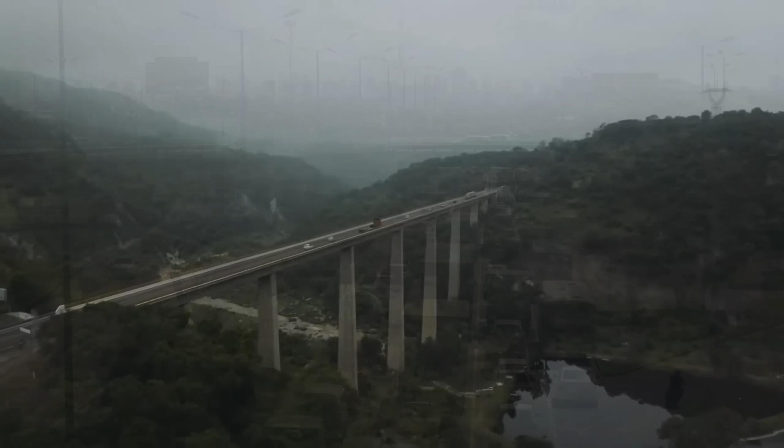When we head out on the road, whether it be our daily commute, a trip to the store, or simply for fun, we are, by default, putting ourselves at much greater risk due to the inherently dangerous nature of driving on its own. The risks of driving are due to many factors, most of which, though, drivers are expected to remain keenly aware of when sharing the road, stopping at red lights, yielding to traffic, observing speed limits, a number of factors we're expected to keep an eye out for at all times.

However, the integrity of structures used for carrying this traffic is, quite reasonably, not something we're ever expecting to crumble out from under us. On Wednesday, August 1st, 2007 though, at roughly 6 p.m., a busy time for evening commuters, the main deck portion of the I-35W bridge in Minneapolis, with more than 100 occupied vehicles and 17 construction workers aboard its deck at the time, collapsed suddenly into the Mississippi River below.

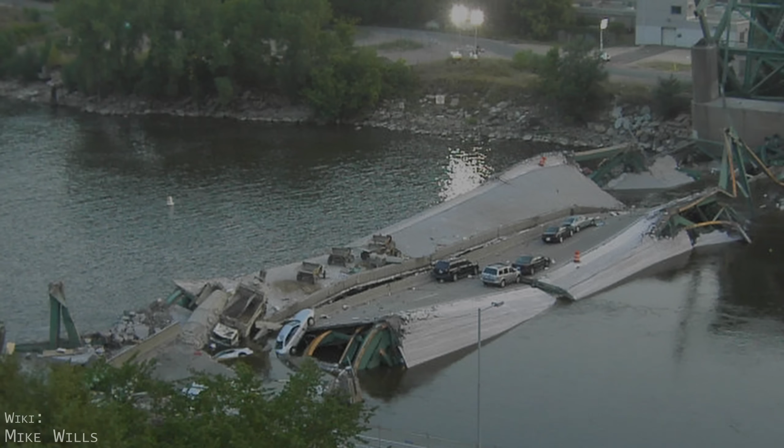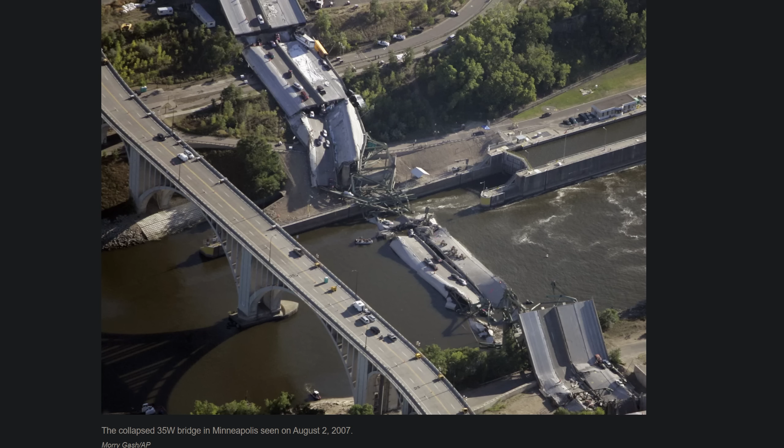This catastrophe claimed the lives of 13 people, and 145 more would be injured. 1,000 feet of the nearly 2,000-foot-long, 8-lane bridge had fallen away, roughly 450 feet of which falling into the 15-feet-deep waterway below. The initial scene was overwhelming, and many were understandably panicked.

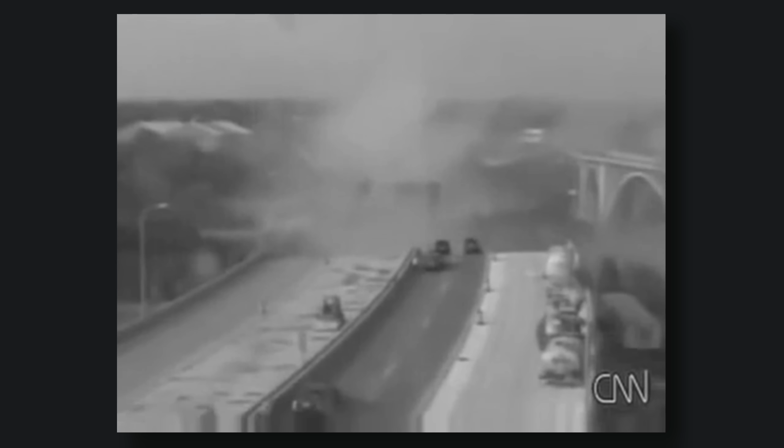Motorists nearing the span that had just collapsed began turning around and driving away frantically. Those on board the bridge's now precarious approach spans that were left still standing began fleeing their vehicles as virtually everything in their field of vision had just dropped away instantly as they were commuting, and into a cloud of dust, chaos, and confusion below.

Folks, we're looking at a surreal scene right now. Just to bring you up to date, this is the 35W bridge over the Mississippi River. It has collapsed. By our crew's estimates, citizen first responders on the scene numbered over 100 plus.

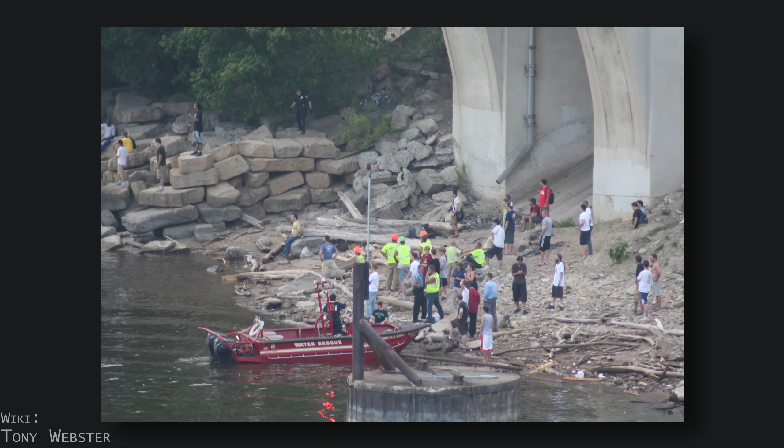Construction workers just then leaving and arriving for their shift, students and staff from the nearby University of Minnesota campus, medical personnel from the nearby Red Cross building, in addition to many brave passers-by, many of which entering the river, pulling construction workers and motorists they could reach to safety.

The collapse took place at roughly 6 p.m., and by 6:10 as the first Minneapolis police and fire units began to arrive, eventually totaling 19 fire engines, a command post was quickly established by authorities in the Red Cross building's parking lot nearby. By 6:14 p.m., the Hennepin County Sheriff would be the first to arrive on the water and begin conducting rescue operations in those areas where stricken vehicles had been trapped in the river.

Hennepin County Medical Center initiated its disaster plan, calling in more medical personnel, readying local hospitals, and dispatching all ambulances available to the rescue site.

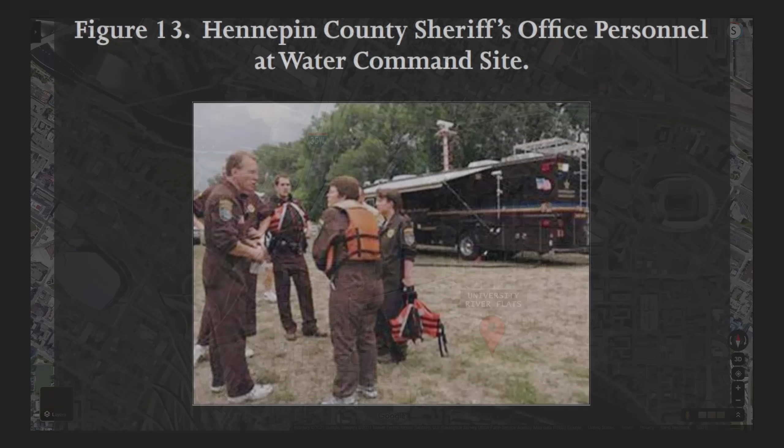The Sheriff's Office would establish their River Incident Command Center by 6:25 p.m. on the north bank of the river near the University of Minnesota's River Flats. This was the closest point on the riverbank with enough boat ramps for such a rescue effort. Before the first hour would be over, 12 public safety agencies had arrived, bringing a total of 28 watercraft to assist with the precarious river rescue.

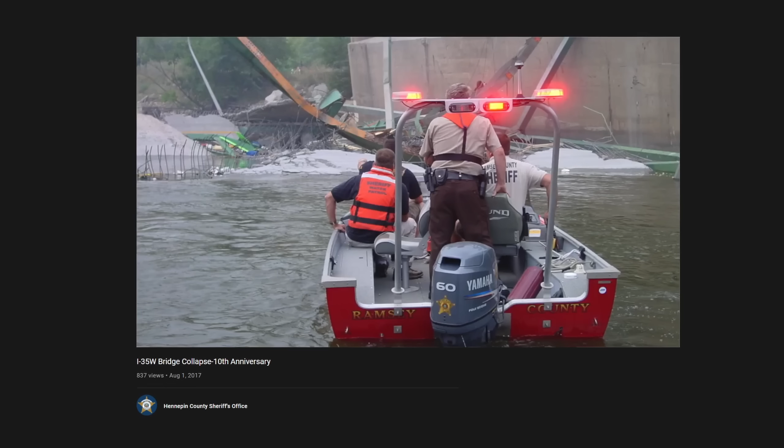By 7:27 p.m., command of both operations declared all water teams would go from rescue to recovery. On August 2nd, the following day, the U.S. Coast Guard arrived on scene to form a temporary security zone from the upper St. Anthony Falls to the lower portion. And at 7 p.m. that same day, command of the scene was transferred from the Minneapolis Fire Department to the Police Department, as it would then be declared a crime scene due to the possibility of an extremist attack being the cause.

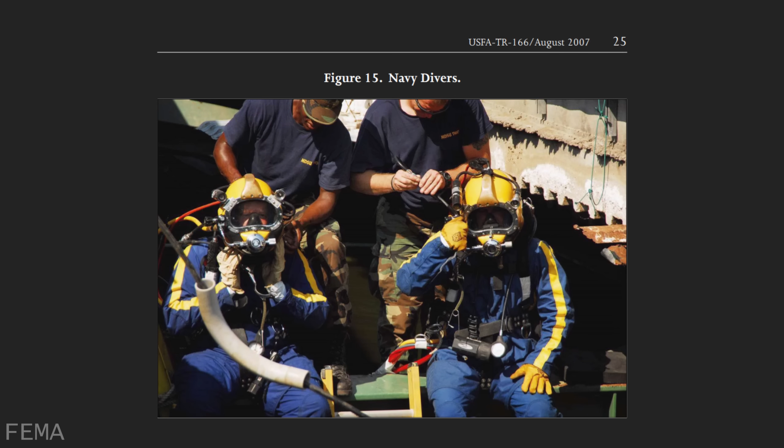By August 4th, the Hennepin County Sheriff's Office requested further aid in underwater search and investigation. The FBI's USERT, or Underwater Search and Evidence Response Team, and U.S. Naval Sea Systems Command diving and salvage teams arrived on the 5th and 6th, respectively.

By the time this monumental rescue and initial investigation had been completed, a total of 190 people were confirmed to have been on the deck or near the bridge at the time of the collapse. Of the 190, 13 were fatalities, 34 received serious injuries, 111 received minor injuries, and 32 were either uninjured or unknown.

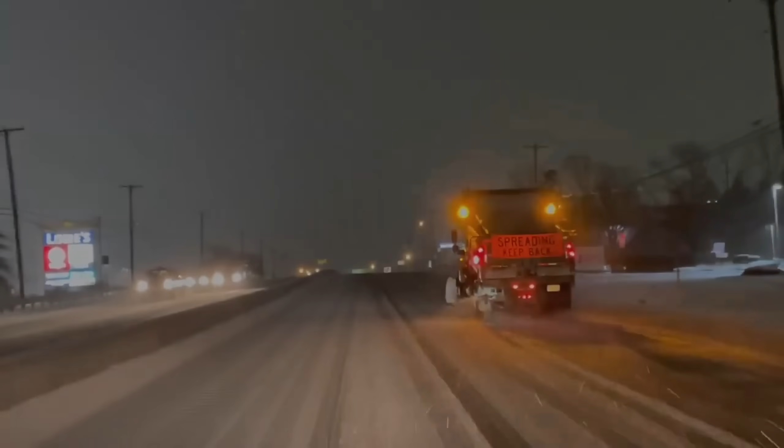The matter of bridges and their construction in the United States is complicated, much like the country's infrastructure issues in general. While regulation, budget, and maintenance standards can vary greatly from state to state, so too can overall climate and topography, as the nation runs the gamut from coastal marine environments, dry southern deserts, to harsh long winter climes, where road surfaces have been heavily salted for decades.

Designated Bridge number 9340, commissioned by the state of Minnesota's Department of Highways between 1964 and 65, Bridge 9340 would be designed by Sverdrup and Parcel and Associates, with these designs ultimately signed off on and approved by then named the Minnesota Department of Highways.

Its deck approximately 115 feet above the lower end of St. Anthony Falls, the bridge would ease traffic congestion crossing the Mississippi into and out of this bustling portion of Minneapolis, by allowing vehicles to cross at highway speeds, at the time 50+ miles per hour.

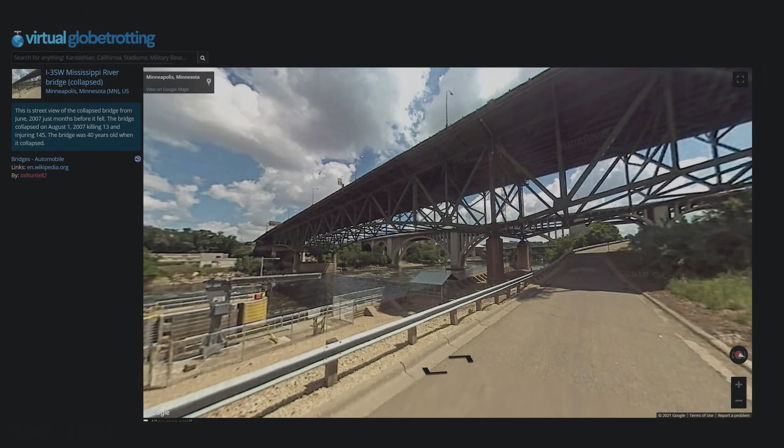The bridge was built by Hurcon Incorporated, with steelwork of the structure engineered and staged by the Allied Structural Steel Company, which was also the steel fabricator for the project.

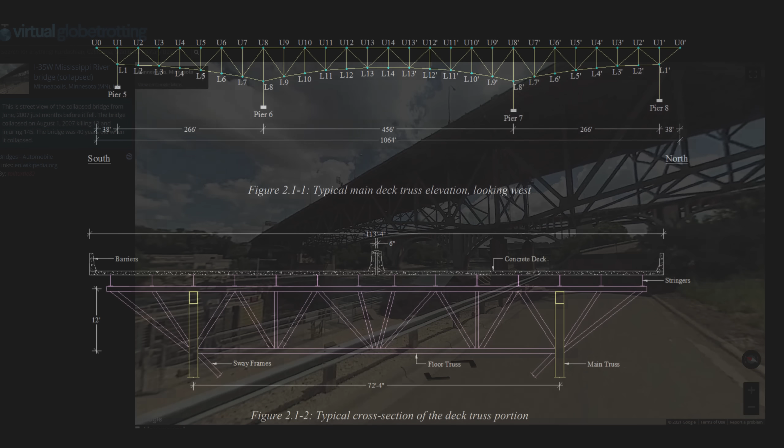The I-35W bridge would be an 8-lane, arched, Warren-type truss deck design, with the main deck being supported by 4 main piers. This allowed for a relatively high clearance to the river below and an unobstructed, Spartan, minimalist upper deck.

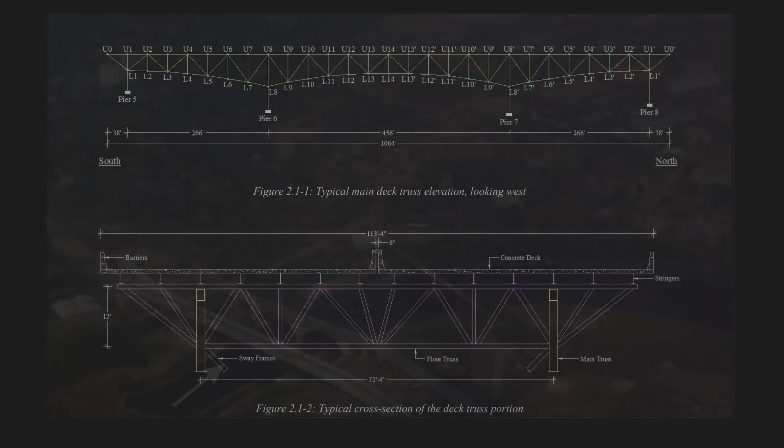Completed in 1967, it opened in November to traffic being diverted from another bridge in the area undergoing renovations, and would take on the I-35W highway traffic starting in 1971.

Once rescue and recovery operations had been completed, the final victims' remains were pulled from the wreckage reportedly on August 21.

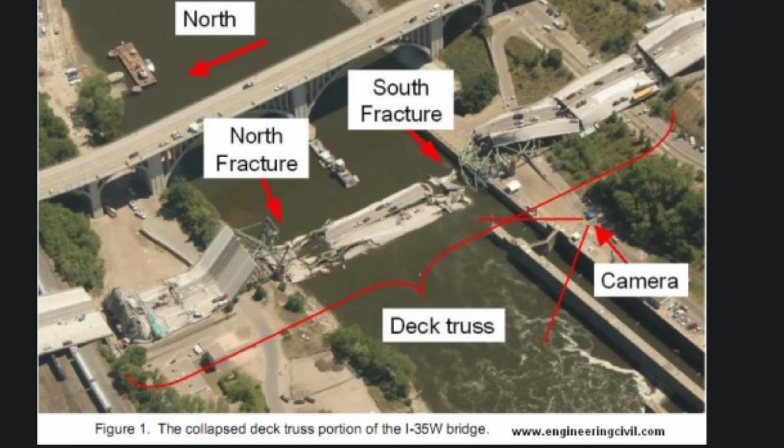It's easy to say hindsight is 20/20 due to the plethora of factual information we now have regarding this tragedy. However, at the time, it cannot be overstated just how much of a mystery this collapse was for investigators initially. Much like the NTSB would piece together a stricken aircraft when investigating an aviation accident, many somewhat similar methods would be required here.

Important to note, though, is that during rescue and recovery operations, even salvage operations intended directly for investigative purposes, it's difficult, and in many instances impossible, to recover such massive objects like stringers from the deck, main truss members, and other similar connected structures without torch cutting, shearing, twisting, and causing further deformation in simply attempting to relocate them.

Investigating and piecing this puzzle together, much of which taking place at the Bohemian Flats Park nearby, where salvaged members were reconstructed and examined, would be a lengthy and laborious process, all while trying to make heads or tails of what was evidence from cause versus deformation from rescue and recovery.

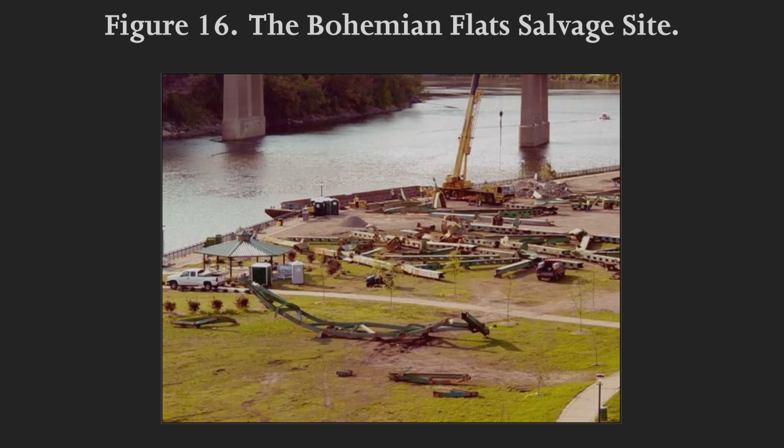However, as if to foreshadow future findings, and in addition to authorities being well aware there was much construction load that day parked on the main deck, on August 8, 2007, only 7 days after the collapse and well before any conclusions had been reached, the Federal Highway Administration issued Nationwide Technical Advisory 5140.28 regarding construction loads on bridges.

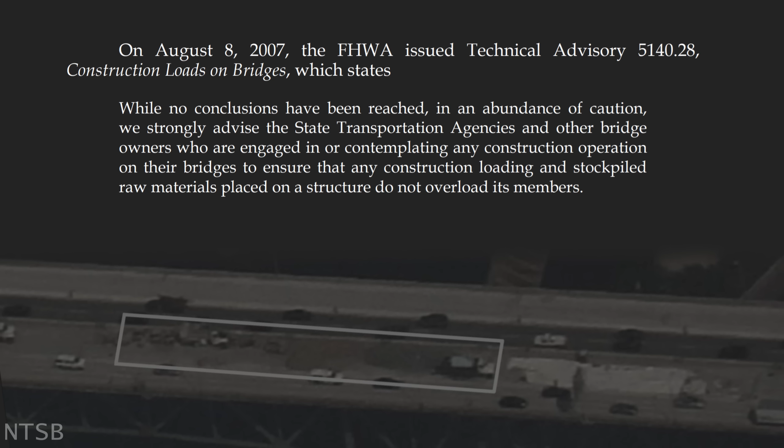While no conclusions have been reached, in an abundance of caution, we strongly advise the state transportation agencies and other bridge owners who are engaged in or contemplating any construction operation on their bridges to ensure that any construction loading and stockpiled raw materials placed on a structure do not overload its members.

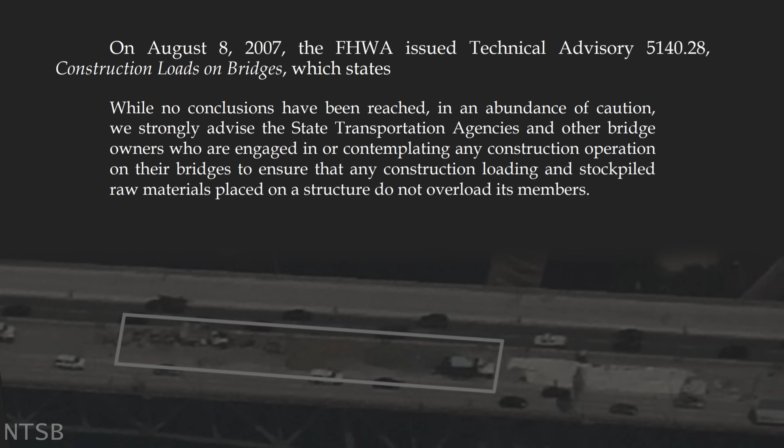Participating in the investigation alongside the NTSB were reps from the Federal Highway Administration, Minnesota Department of Transportation or MnDOT, Hennepin County Sheriff's Office, and a contractor from the company that had been performing work on the bridge the day of the collapse, Progressive Contractors Incorporated.

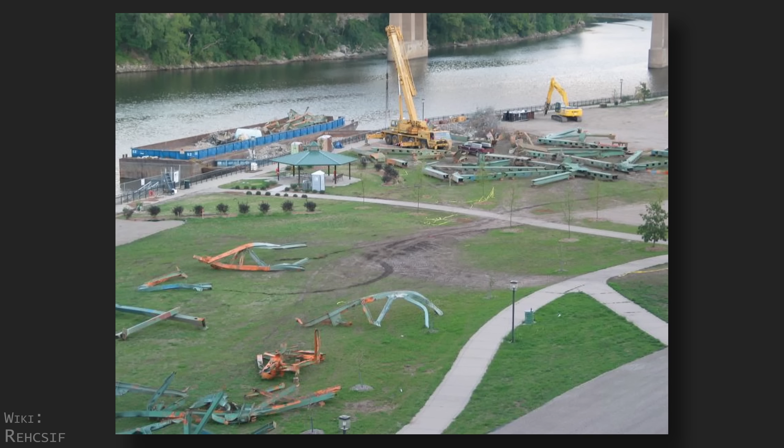The on-site investigation and analysis required many investigators remain present all the way through November of 2007. Beyond this, though, lab analysis and further investigation by the NTSB would continue well into 2008, with their final report being released on November 14th of that year.

It simply can't be overstated the amount of effort and dedication it took from authorities to piece this puzzle together. After pouring through reams of PDF after PDF myself from both .edu papers and the NTSB's 178-page report, my typical routine for these videos, this time it's a bit different. Covering the sheer volume of factors they had to unearth that could have led to this failure, buried in documents, designs, and inspection history over a period of 40+ years, would make this video far too long.

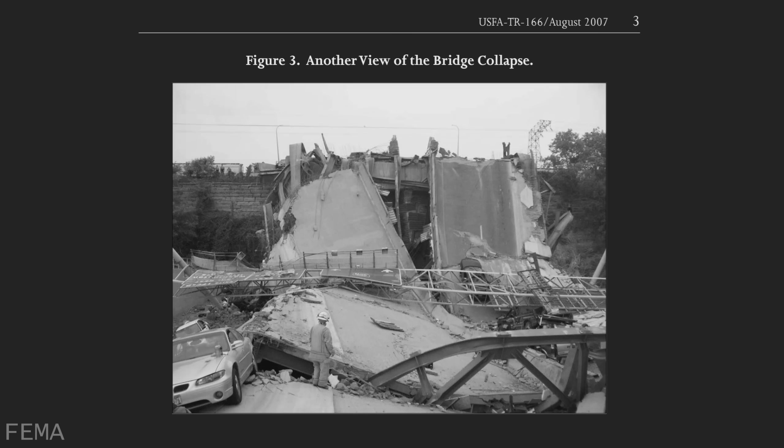As is typical with disasters of this nature, it's almost always down to a lengthy chain of failures and mishandlings. Rarely is there a single party or cause to blame. This one underwent changes so slowly, hidden behind a deeply entrenched lack of awareness even among experts, that warning signs went undocumented or overlooked during inspections, as a crucial load-bearing portion of this steel deck truss design wasn't well understood industry-wide until the collapse took place. But I will attempt as thorough a summary as I can.

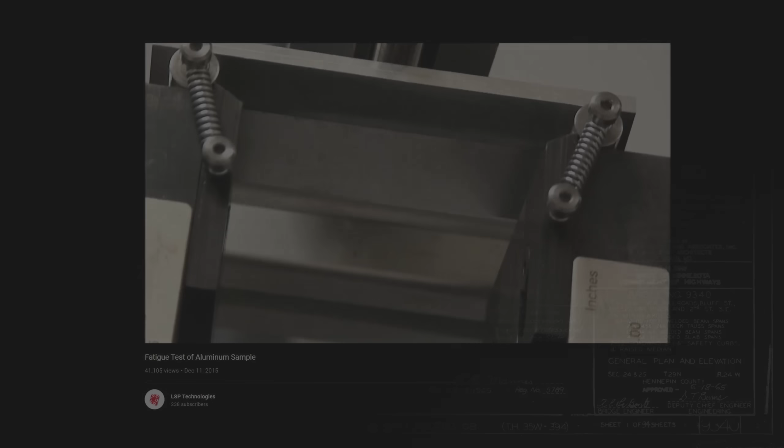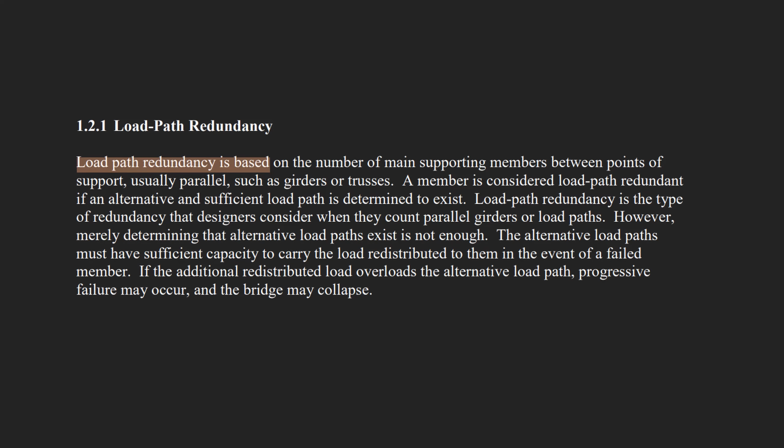The I-35W bridge had been designed and built prior to metal fatigue cracking being well understood. In the late 1970s, when a better understanding of metal fatigue cracking was established within the industry, deck truss bridges such as the I-35W bridge were recognized as being non-load path redundant, or fracture critical. That is, if certain main truss members failed, the bridge would collapse. It was well known that the I-35W bridge was non-load path redundant.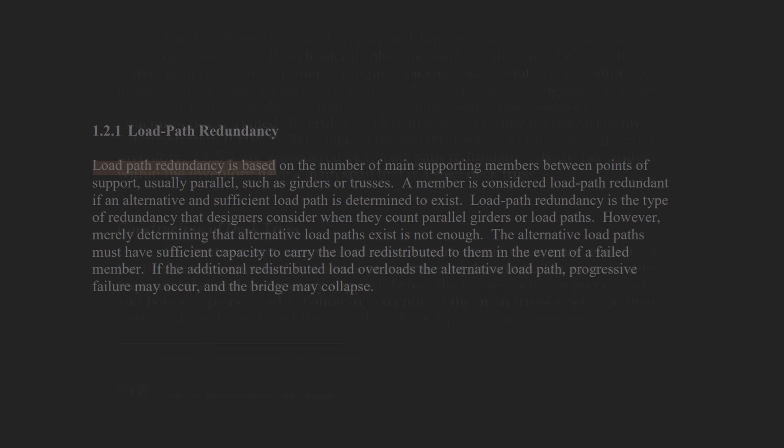It's also well known that as of 2007, 19,273 U.S. bridges are non-load path redundant, or fracture critical. While fracture critical bridges are of outdated design, this term basically means they're more susceptible to major partial or total collapse if even just a single load-bearing element fractures. It's not inherently unsafe according to officials, but I'm going to go out on a limb and say that a bridge left standing after single or multiple structural failures is safer than one that doesn't.

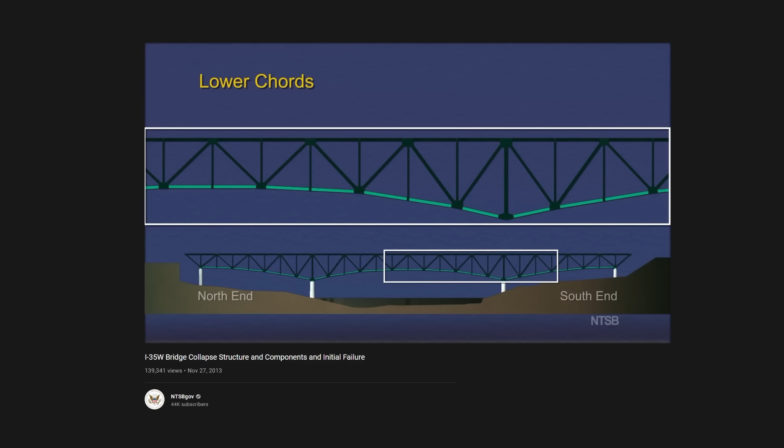When analyses of main trusses in tension and compression, among other load-bearing members like lower chords and floor trusses, revealed no major failures, attention turned to what's referred to as nodes—a connecting point, or to oversimplify, the joint where upper and lower chords join to meet vertical and diagonal members in tension and compression. Some of the major findings ruled out as the cause were fracture of a floor truss, pre-existing cracking in the bridge deck truss or approach spans, temperature effects, and shifting of the piers.

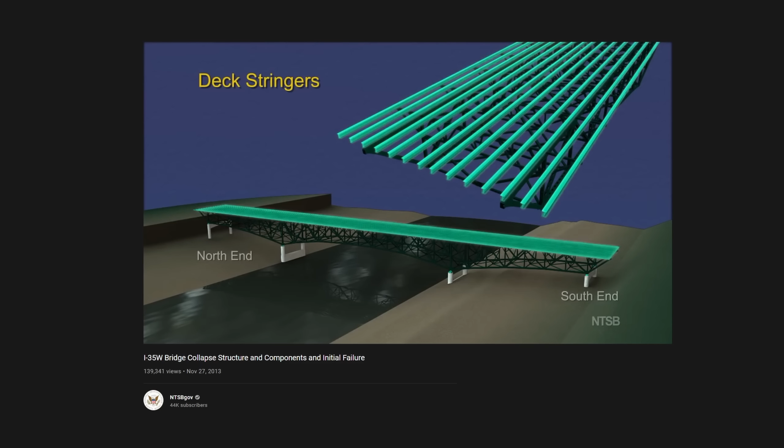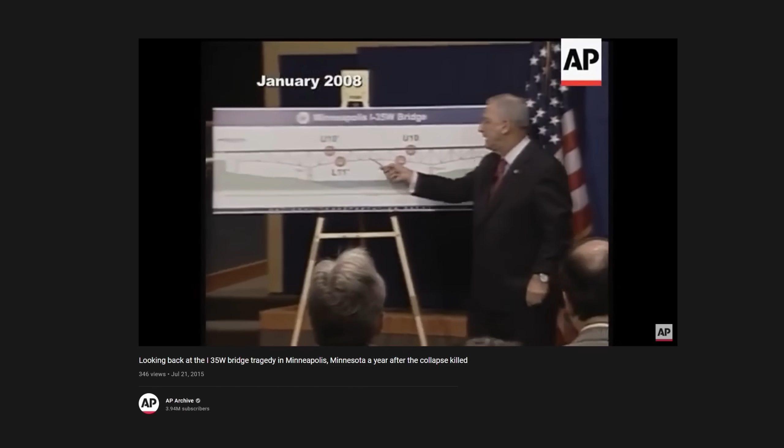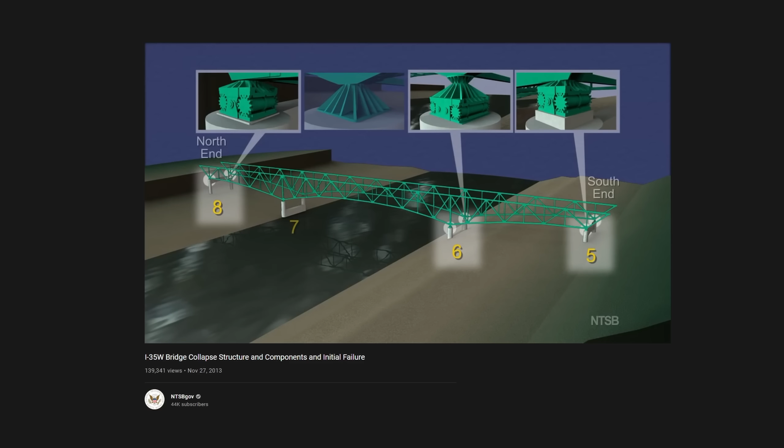Narrowed down to the nodes, a crucial part of these joints—the gusset plates, which unite the diagonals, verticals, and chords on either side of each joint—would essentially be put under the microscope. Our working theory and knowledge tell us it was the gusset plates, beginning with the U10, where the failure was created. The gusset plates had basically separated, torn apart as if these joints had been burst through in a lateral motion. The I-35W bridge did have expansion joints, rocker bearings, and roller bearings to allow for longitudinal movement due to thermal expansion and contraction, along with sway braces and lateral braces to ensure rigidity in lateral movement.

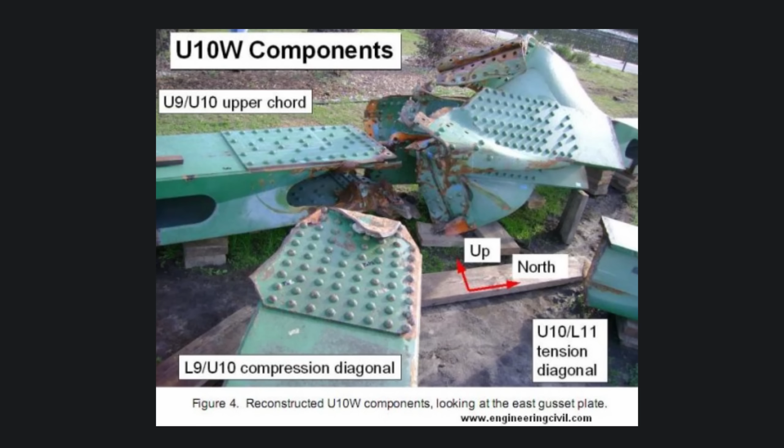When closely examining the gusset plates, there was corrosion damage, but testing bore out that it was within acceptable limits. Upon comparing them against the original designs for the bridge, this too was found not to be the culprit, as the gussets examined matched the original designs and prints for the structure. They were neither fabricated nor implemented outside of those design tolerances.

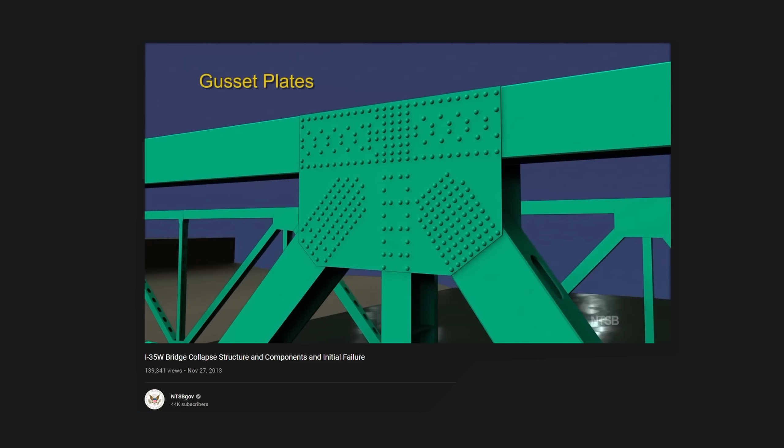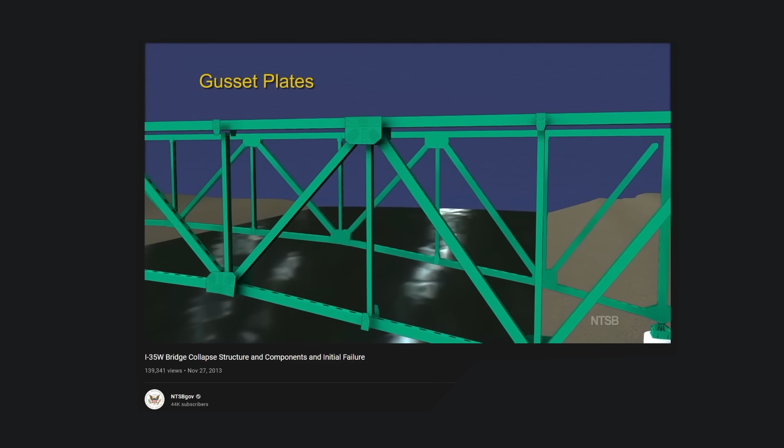However, after much testing of thickness, material type, and other analyses, these gusset plates were found to have been physically inadequate for their intended loads. This could only stem from one factor now: the original designs, for whatever reason, did not call for these gussets to have adequate capacity to begin with—not even for the original design loads of the bridge, let alone the dead load and live load that would be added as time went on.

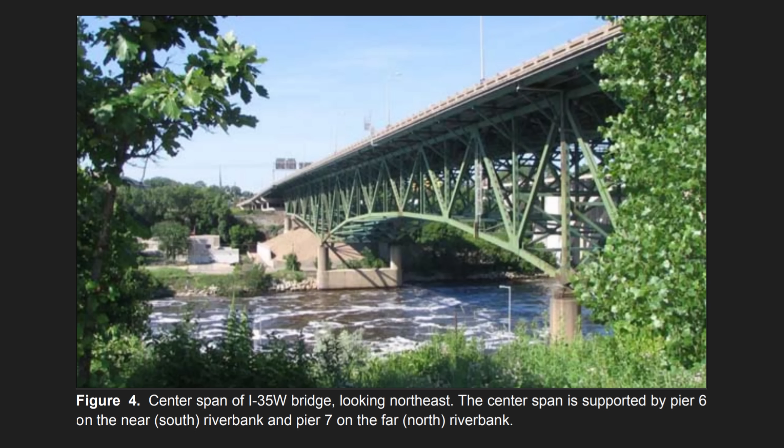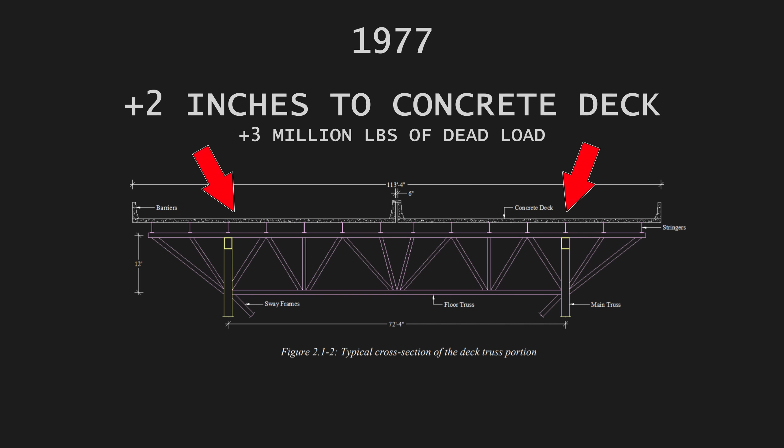In 1977, a renovation to increase deck thickness—ironically a solution by MnDOT to battle ongoing effects of road chemicals that had been corroding rebar on the top deck of bridges in similar climates—added 2 inches of low slump concrete across the entire deck, bringing the deck thickness to over 8 inches and adding more than 3 million pounds of static, or dead, load.

In 1998, work began to replace median barriers, upgrade concrete traffic railings, improve drainage, repair slabs, retrofit cross girders, and, due to the high volume of ice-related accidents during winter months, install an automatic anti-icing system. This employed sensors, 38 valve units, and 76 spray nozzles to apply potassium acetate onto the road surface when necessary, a significantly less corrosive alternative to salt brine.

In all, the 1998 upgrades and repairs added another 1 million plus pounds of dead load.

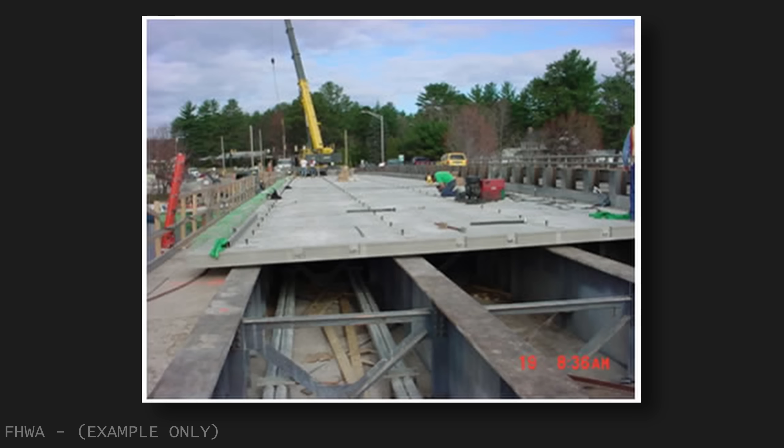Also important to note is that during these renovations, live load factors from construction vehicles, staging of materials like temporary piles of aggregate, and other heavy equipment and supplies had the potential to increase load factors on the bridge while present by hundreds of thousands, even millions of pounds. And it's not always the case that these loads are evenly distributed. Many times they're localized or even heavily congregated around individual locations.

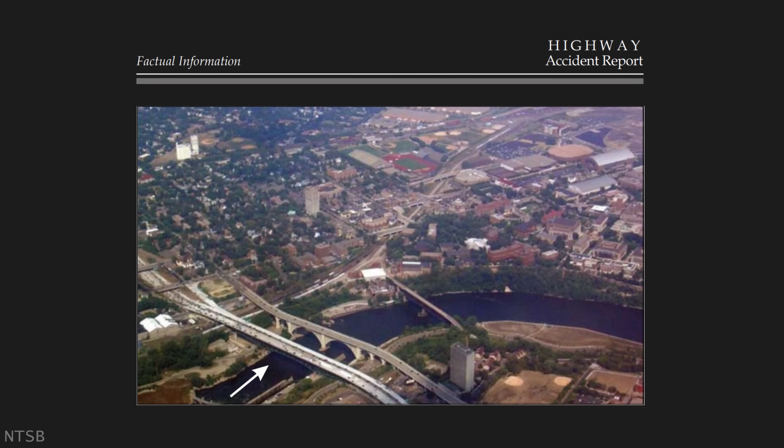Which leads us to the renovation project that began in June of 2007, just 2 months prior to the collapse. Progressive Contractors, the construction company performing this maintenance, was carrying out the seemingly routine tasks of removing 2 inches of top deck concrete, or milling, to be replaced with a fresh 2-inch layer, replacing and patching weathered and worn curbs, reconstructing expansion joints, and replacing aging spray discs and sensors of the anti-icing system. This work had a final completion date planned for October 26 of that same year. As we all know, it was not to be.

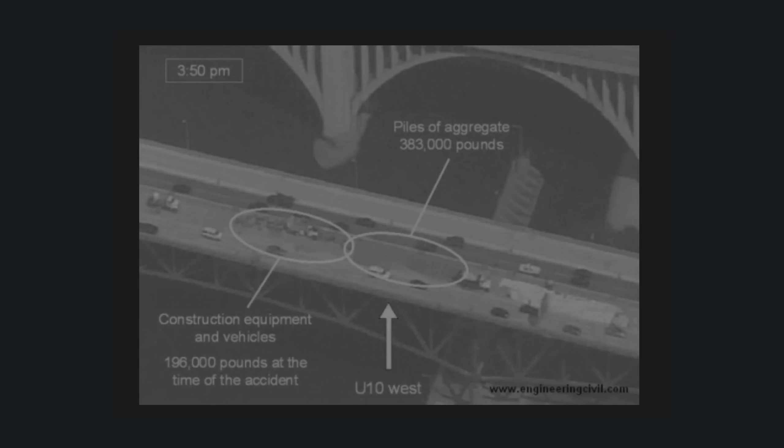Jacobs Engineering, the company who acquired original designers Sverdrup and Parcel, was cooperating and assisting in the investigation. However, amongst all the original prints and plans they had on record, they were not able to produce records that showed calculations for nodes on the main trusses.

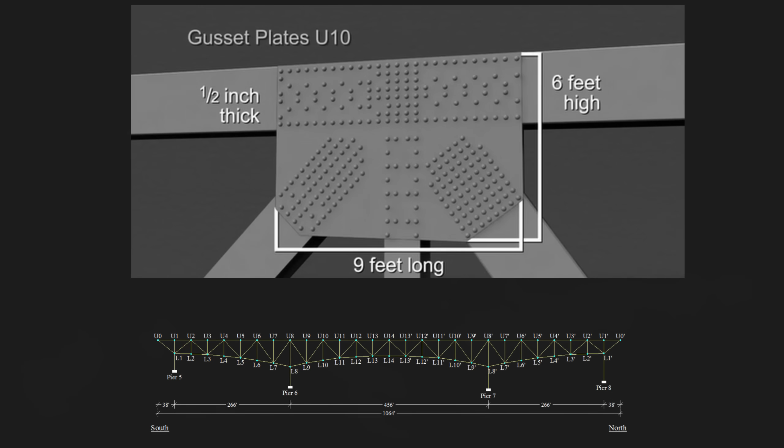In sort of an ironic twist, a former unnamed Sverdrup and Parcel employee had, for whatever reason, personally retained some of the much-needed records of these node and gusset plate calculations. These records showed the breakthrough investigators were looking for.

Sverdrup and Parcel had done their homework, and for the I-35W bridge, virtually all of their calculations and designs for dead load, live load, thermal expansion, main truss loading, cross members, and the like were found to be valid. The NTSB even determined they had known full well how to design nodes and gusset plates, and even properly calculate their tolerance to stress effects.

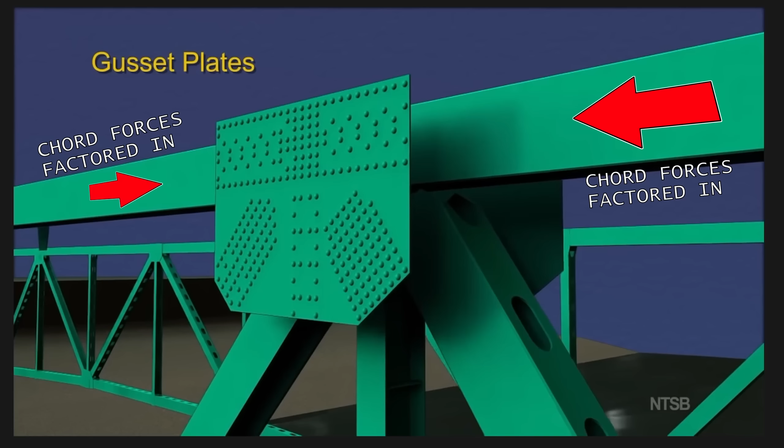But for Bridge 9340, the effects of chord carry-through forces were all that was found to be factored into the size, number of rivets, and rivet patterns for the gusset plates. The diagonal members and capacity needed to bear their lateral load was completely omitted from all calculations and designs signed off on by the then-named State of Minnesota Department of Highways.

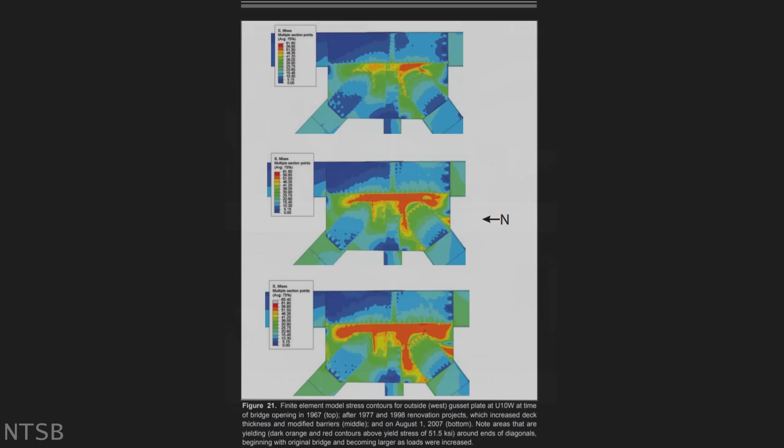Longitudinal movement is typically much greater than lateral movement in bridges like these, thus the need for expansion joints and roller bearings. But despite lateral or sideways movements seeming minimal comparatively, they still exert a massive amount of force on all supporting members. Over time, lateral motion where the tops of diagonals met all 4 U10 joints would deform these under-engineered gusset plates back and forth over the previous 4 decades to the point where total fracture was imminent.

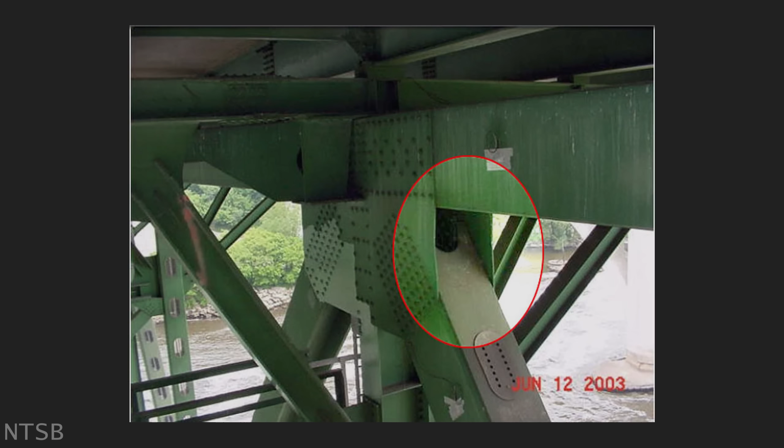Ironically, these photos you're seeing here of the bowed gusset plates on all 4 U10 location nodes were taken during inspections, specifically inspections as recent as 2003. And if you're like me, you might be asking yourself, how would trained inspectors not notice these deformations? They may appear minimal to our untrained eyes, but this is what these people are trained for, isn't it? Well, unfortunately, no, quite the opposite.

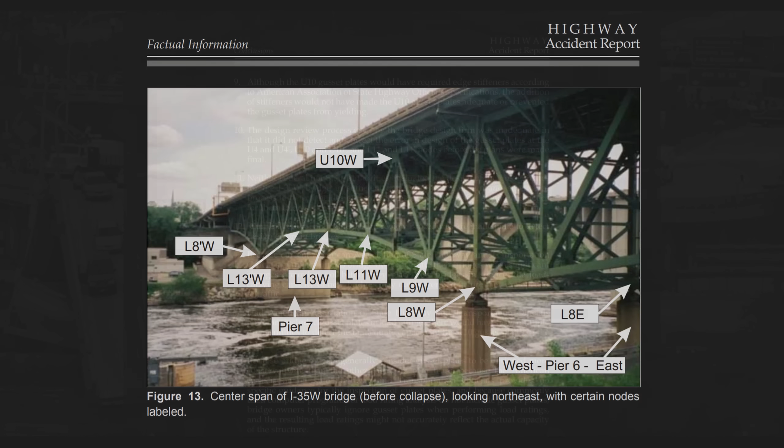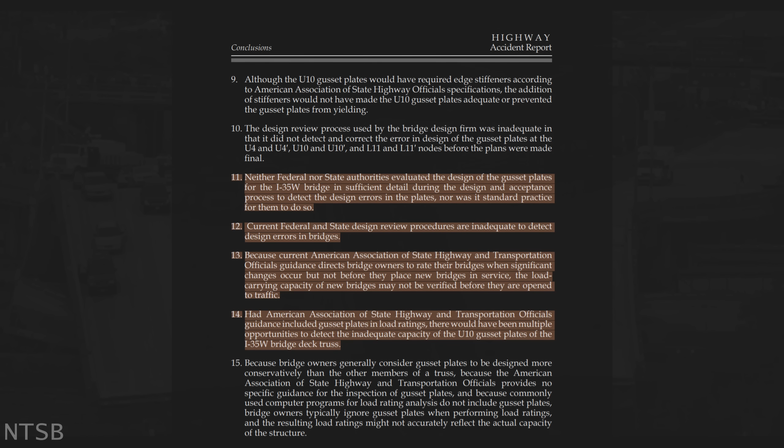See, even up until not all that long ago, gusset plates and their nodes have been, to oversimplify, little more than an afterthought for all bodies regulating this stuff in the U.S. According to the NTSB, neither federal nor state authorities evaluated the design of the gusset plates for the I-35W bridge in sufficient detail during the design and acceptance process to detect the design errors in the plates, nor was it standard practice for them to do so.

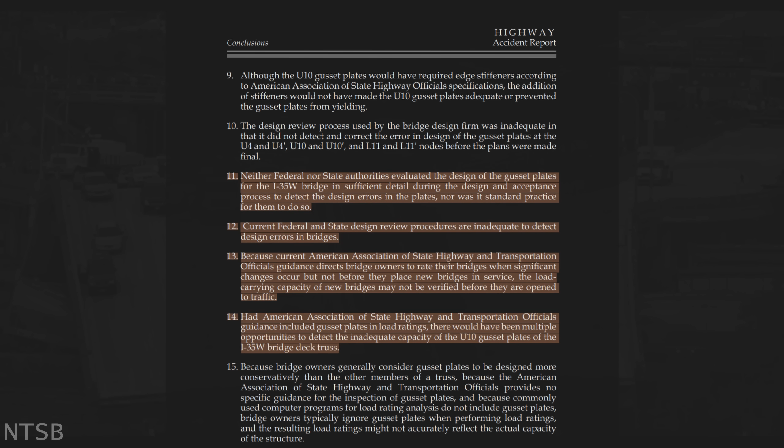And as of the report for this collapse even, the NTSB also concluded current federal and state design review procedures are inadequate to detect design errors in bridges. So, yeah, we'll come back around to this bigger picture issue here shortly.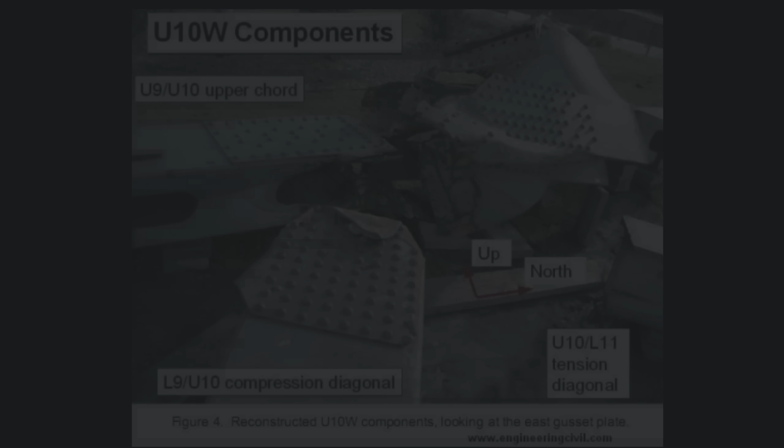The overarching theme regarding the inspections can be summed up in the attitude of a professional safety engineer, one who specialized in fracture-critical bridge inspections, who observed the deformation of these gussets in 1997, and when interviewed stated, 'That's construction. That's original construction,' as if to dismiss the bowing of gusset plates as some sort of original construction issue and not cause to have been concerned. He'd go on to say, 'Gusset plates are over-designed. The safety factors within those gusset plates are 2 to 3.' Again, some sort of dismissive assumption meaning all gusset plates are engineered to be 2 to 3 times more robust than required, a conclusion he claimed was reached because that's the way they taught it at his undergraduate school. He would also state, 'Our inspections are to find deterioration or findings of deterioration on maintenance. We do not note or describe construction or design problems.'

By the day of collapse, that renovation project had been underway for approximately 2 months. Construction materials, equipment, and vehicles had been parked directly above Node U10 West, with the heaviest portion, piles of aggregate weighing in at nearly 400,000 pounds, being within closest proximity to the soon-to-be failure point. Traffic was also reportedly bumper to bumper, as it was both near rush hour and, due to construction, the road work made the bridge somewhat of a bottleneck.

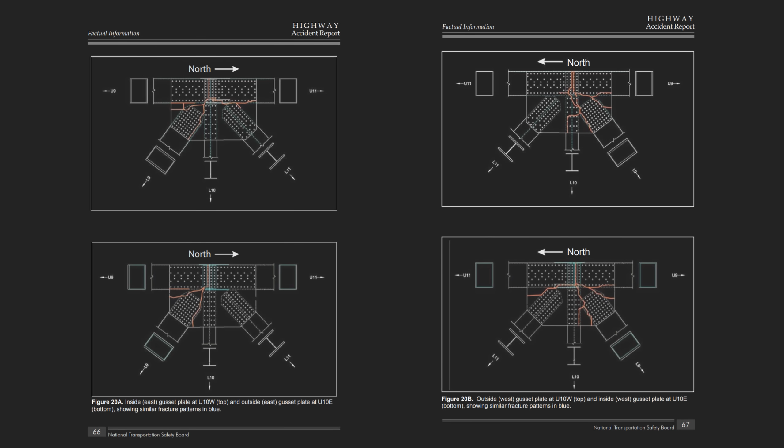Once this node gave way, since this was a fracture-critical or non-load path redundant bridge, total collapse of the main deck was inevitable, with fractures of the other weakest points, the other U10 nodes, following shortly thereafter as the main deck gave way. According to the Federal Highway Administration, of those 19,273 bridges in the U.S. that are considered non-load path redundant, about 465 of them have a main span that is a steel deck truss.

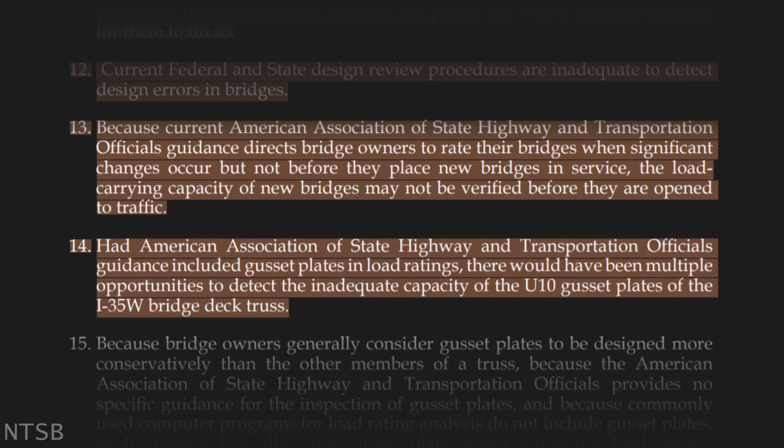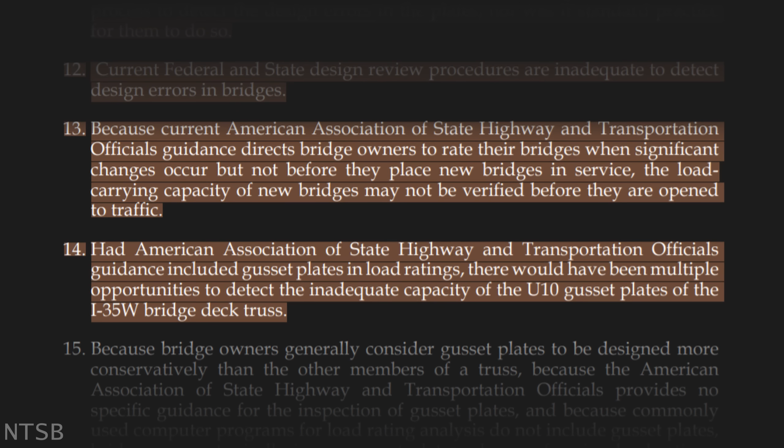As of the NTSB's report in 2008, because current American Association of State Highway and Transportation Officials guidance directs bridge owners to rate their bridges when significant changes occur, but not before they place new bridges in service, the load carrying capacity of new bridges may not be verified before they are open to traffic. Had AASHTO guidance included gusset plates in load ratings, there would have been multiple opportunities to detect the inadequate capacity of the U10 gusset plates of the I-35W bridge deck truss.

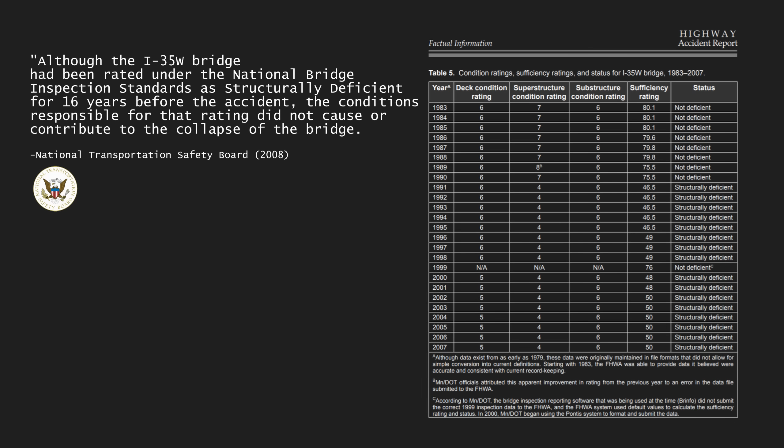Also something I find a bit unsettling: although the I-35W bridge had been rated under the National Bridge Inspection Standards as structurally deficient for 16 years before the accident, the conditions responsible for that rating did not cause or contribute to the collapse of the bridge. I'm reading this as the failure to understand nodes and their gusset plates by the industry meant inspections that already found several deficiencies were still overlooking many even more critical deficiencies.

Many recommendations were made by the NTSB following this incident, obviously, but in America's political climate it begs the question, what progress has actually been made? Well, it's not all doom and gloom, as many states had already begun to step up even prior to this incident. The industry just needed a push in the right direction as to what they should be actually looking for, instead of looking for excuses.

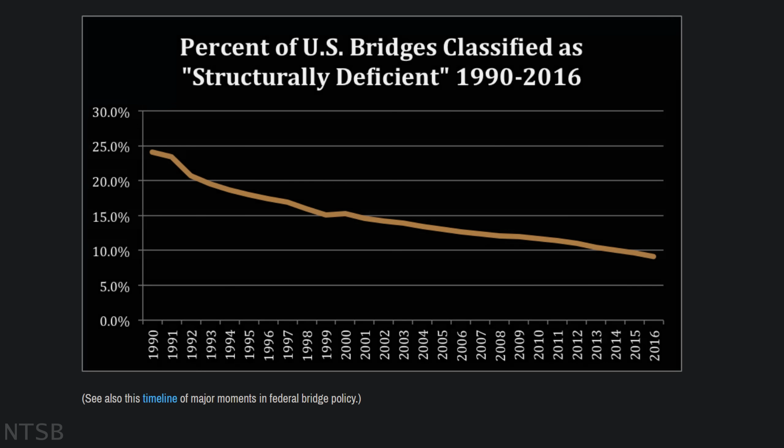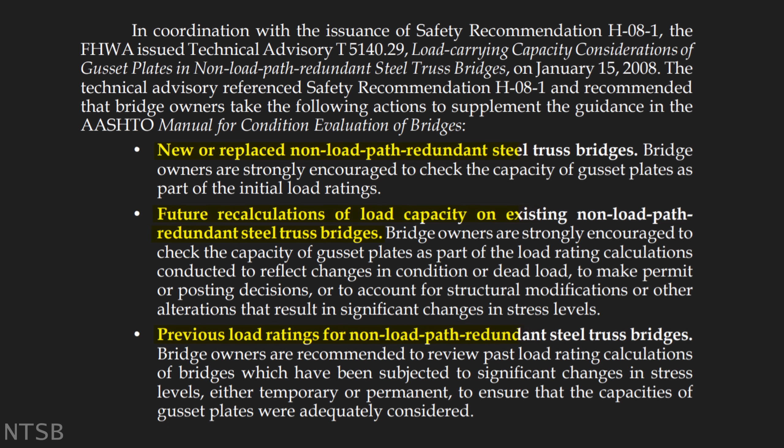As a former safety guy for OSHA, I can honestly say, regardless of political outcomes from these incidents, and whether or not budget allows it, the hard lessons learned, like inspecting and testing gusset plates properly, the people who care about this stuff, as few as they may be, will push for standards to be changed, awareness to be raised. For instance, the Federal Highway Administration immediately began pushing out their technical advisories, even before the NTSB's report was finalized. Much of this stuff takes zero budget and no politics, just people who care enough to push for it.

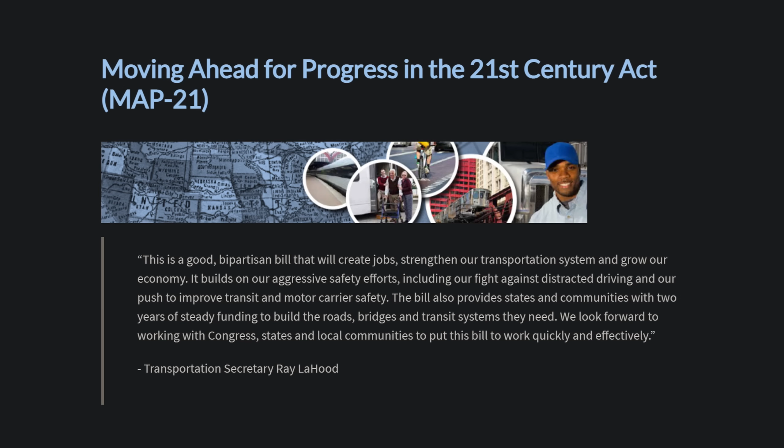America's approach to infrastructure still leaves much to be desired, of course, but apathy or lack of awareness is pervasive. No amount of policy changes and political grandstanding will change human nature. But raising awareness, word of mouth at the day-to-day 9-to-5 level, that's invaluable. And industry-wide in the U.S., this incident, for many hidden engineering and technical issues, was a wake-up call regardless.

The I-35W St. Anthony Falls Bridge, a sturdy concrete box girder design, would be constructed in its place quite rapidly, but of course under heavy scrutiny. The Minnesota Department of Transportation even kept a web page updated with weekly updates and other interesting facts about the new bridge. It would open just 13 months after the collapse, in September of 2008.

A memorial garden can be found directly to the west on the south bank of the Mississippi between the upper and lower falls, just 1,700 feet away.